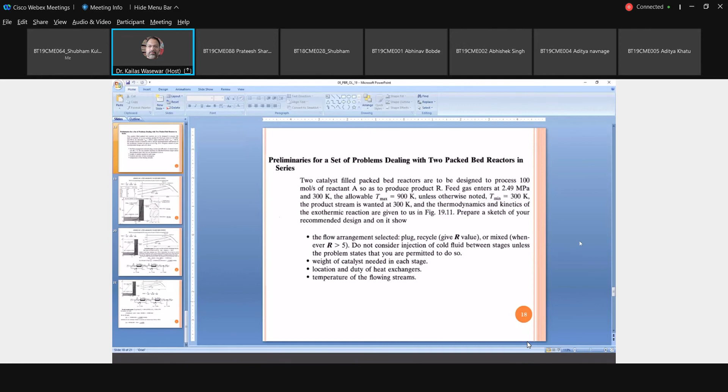We can continue with adiabatic reactors, that is packed bed reactors. We have seen that mostly there is an issue of temperature control, and that can be controlled at industrial scale mainly by using intermediate cooling, or if it is highly exothermic and not controllable in a single column, we may go for two columns, as we have seen in our CRE1 also. If that curve of 1 upon RA and CA is somewhat different, it is possible to arrange two reactors in series, maybe CSTR, maybe PFR, or a series PFR combination.

So similarly here also, to maintain the temperature, to control the temperature, we can use two packed bed reactors. There are now a lot of softwares available to design for this, but these are the typical methodologies that have been adopted in the software itself.

So the case is that there are two packed bed reactors which we have to design, to process 100 moles per second of the reactant. It is not mentioned if there is inert present. If there is inert, total flow rate may change, and based on that its capacity will change, volume of the reactor will change, but the weight amount of the catalyst will not change, remember. So we process 100 moles per second of the reactant so as to produce the product R.

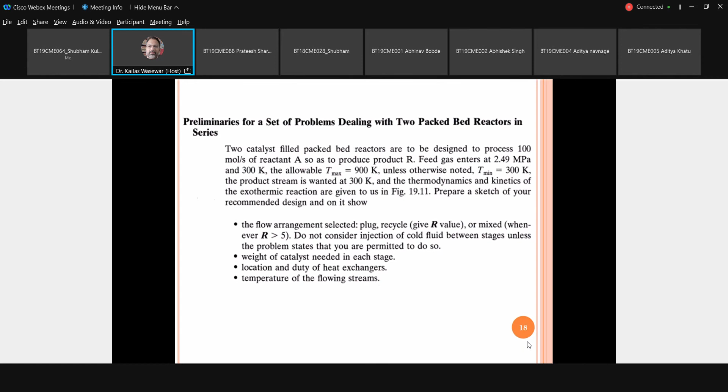And in other cases they have mentioned, do not consider injection of cold fluid between stages unless the problem states that you are permitted to do so. Weight of the catalyst we have to calculate for each stage, and location and duty of heat exchangers, and temperature of the flowing stream. This information we have to get from this particular problem.

So the case is that again we can see this figure which is given for the first order reversible reaction, delta HR is given and other parameters are given: rate constant, Cp. So it is pure A. Work out a good design for 85% conversion.

So Cp upon minus delta HRA, so the slope we can easily get, it is 1 upon 2000. Now for this particular slope...

But to draw the operating line, we must first know at least the initial point. So the adiabatic lines, these are parallel lines, we can see that. So we can take the optimum progression. So this will be the optimum progression here.

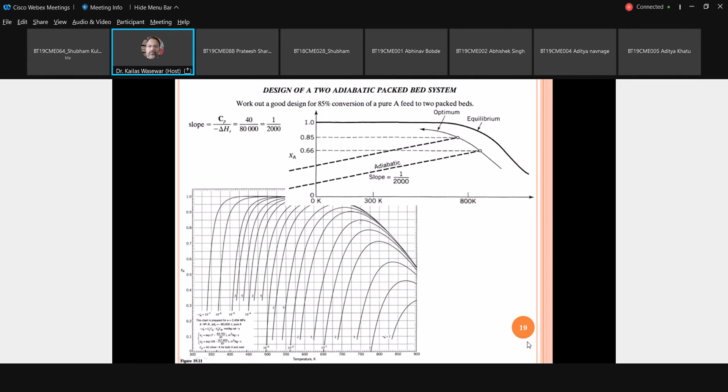So for this optimum one, we can draw this particular point, say 0.85, somewhere here, having the maximum at this point. So this is our maximum conversion for a particular rate, is it? So 0.85 somewhere here will come to this particular point. So it will touch this particular maximum one.

So we can take it as one of the points, and that may be coming around some 750, or it is coming to be 0.88. It is around 750, yes it is good. So 750, here you can see the first point, and taking this first point, you can draw the operating line.

So here the same thing is given. By taking the 0.85, we have taken it. But when we are going for operating this one, is it? The minimum temperature is 300. So we have to go for the second stage. So the second stage may be somewhere here, but having the slope again 1 upon 2000. So parallel lines we may draw here. We'll see this one.

So in the earlier case, we have seen 0.85; this is the data we interpolated earlier, for the particular operating line. If you take 0.85, this will be the RA. It is 0.05. Similarly, if you go down slowly across the line,

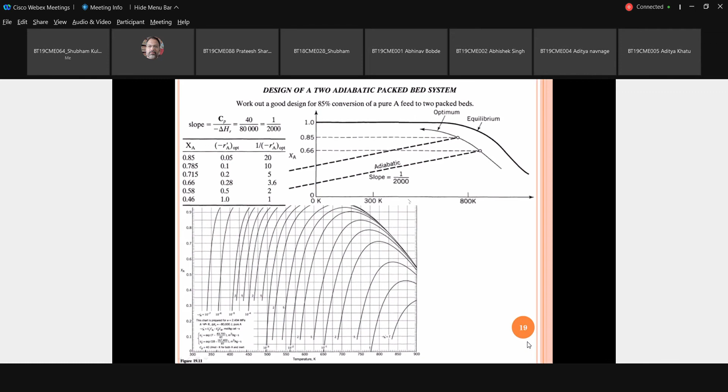So this is our first reactor. Suppose we start from this particular one, and then this will be the second reactor. So this way we can plot the curve. This data we can see. We don't require the other data because this will go down here somewhere, approaching 0.

So as we are using the mixed flow reactor, the area will be directly this one. So we don't require that data. We can take it up to 0.66. And how we got this particular value, remember, is by maximizing this area. If we maximize this area, that means the minimum of this area.

Okay. So we have taken the operating line data up to 0.46 and the RA value. Then we can take 1 upon RA and plot it. Now in this case, area under the curve we can easily calculate. And based on the area of these two, the area is equal to W upon FA0. FA0 is given as 100. So we can get the weight of the catalyst.

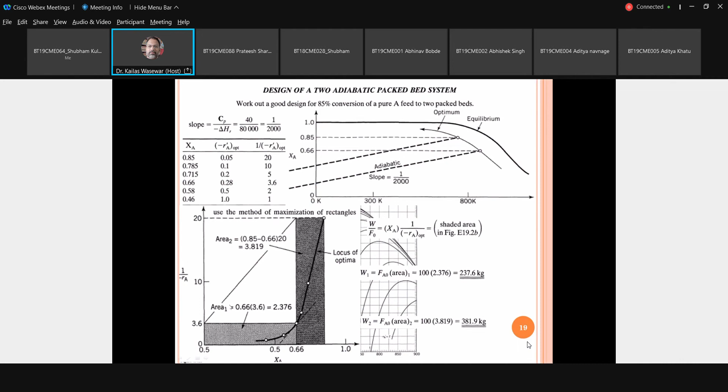Now we have the weight of the catalyst. Once we have the weight of the catalyst, what other things do we have to do? Heat duty. Two mixed flow reactors having the weight of the catalyst. Okay. So we have to cool it.

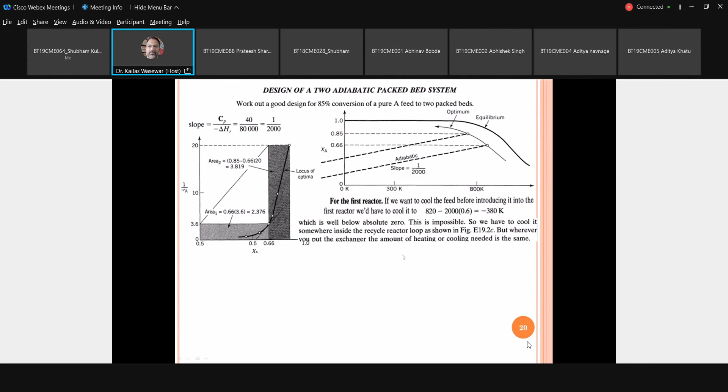For the first reactor, here delta T is coming 380 Kelvin. Sorry. So this particular stream will be at 820. If you see this particular point, 820 is the exit one, and some portion we recycle to maintain the mixed flow reactor. So recycle will be somewhat infinite, continuously. So 820 is the exit temperature, and this conversion will be 0.66.

So you have to multiply with the molar flow rate. Then it will come to 3.2 megawatt, that is 10 to the power 6 joules per second. So 3.2 megawatt cooling is required here to remove the heat from this particular stream. Okay.

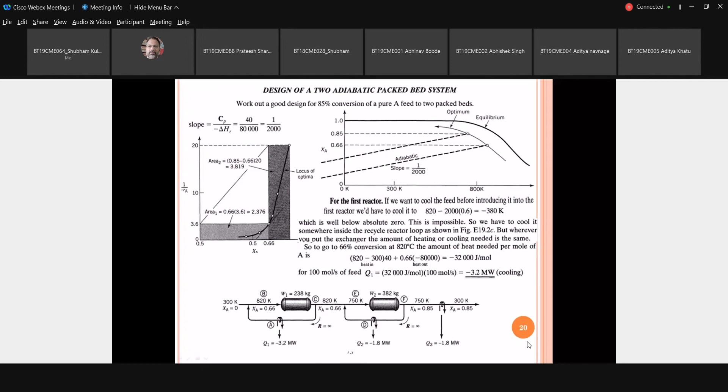Here also we have to give the cooling. Then the exit stream will be at 750. This is at 750, so again cooling will be there. So this way we have to do the calculations. So at least from this chapter, you can solve this example properly.